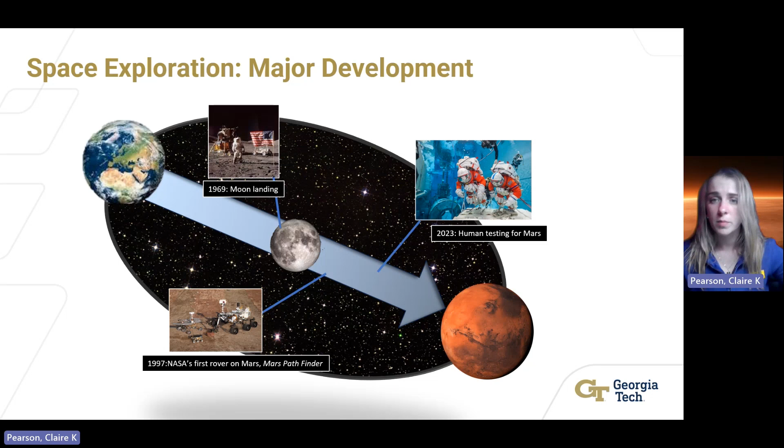In 1969, the lunar landing occurred with Neil Armstrong stepping foot on the surface of the moon. 26 years ago, Mars Pathfinder was the first successful rover to land on Mars. More missions have been successful to Mars, with Curiosity and Perseverance looking at the prospects of life once existent on the planet. Recent developments aim to have manned missions to Mars in the near future.

The big picture is to develop a dual Mars lander ascent vehicle with reliability and features for human and scientific interplanetary research. The goal for this mission is to enhance the processing and telemetry for better feedback control, while expanding the capacity to support life and increase samples. Throughout the mission, we want to ensure reliability and safety for astronauts with power and life support systems.

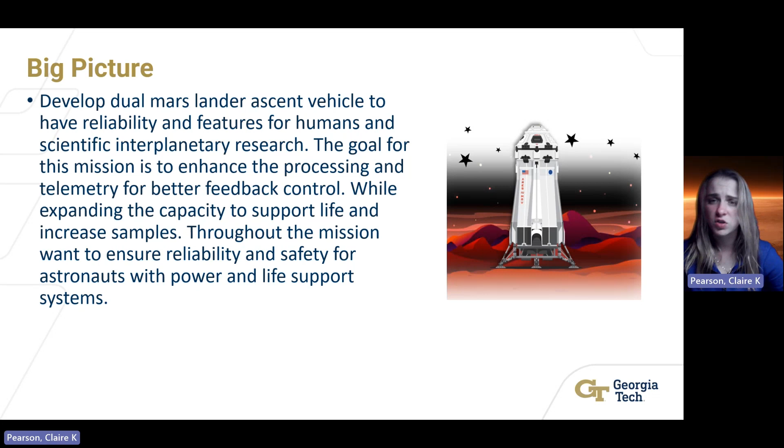Experienced low-cost technology and development, along with media coverage, have incentivized academic research and private companies to work alongside NASA and international space agencies. These are the stakeholders interested in the DLMAV project for Mars.

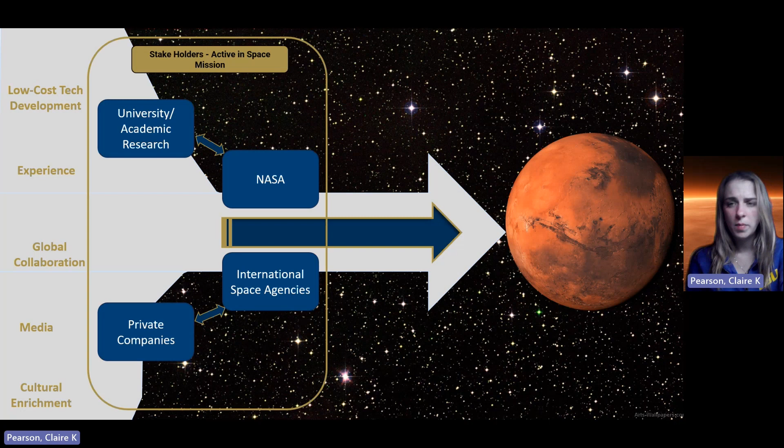Define the problem. The competitors for this project can be seen below. Russia in 1971 had the first lander on Mars. It lacked control and no data was collected during that mission.

In 2021, China launched Zhurong. It was a lightweight vehicle and had great navigation but lost power recently. In 2023, NASA launched Perseverance. It had a range of instrumentation and battery support systems. Improvements to it should be the control and computer processing system.

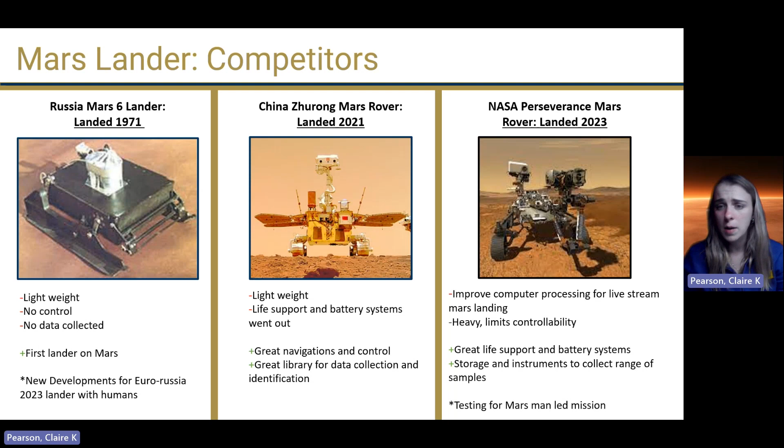New developments are being made by these organizations towards humans landing on Mars. The mission of the dual Mars lander ascent vehicle is broken down into its parts: a successful launch and landing of a dual-person crew, enhanced vehicle control to land within 1 kilometer of each other and carry 25 metric tons, and finally to return to Earth safely with its samples.

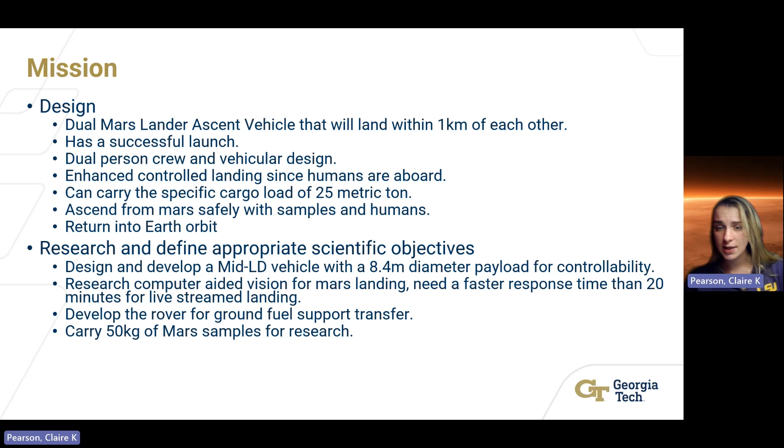Research and science objectives are defined by developing a mid-L/D vehicle with an 8.4 meter diameter, research computer-aided vision to have faster response times than 20 minutes, and to develop the rover for ground fuel transfer support, carrying 50 kilograms of unique Mars samples for research.

The mission overview of the DLMAV includes Stage 1, the launch; Stage 2, interplanetary travel; Stage 3, landing; Stage 4, sample collection; and Stage 5, ascent back to Mars orbit.

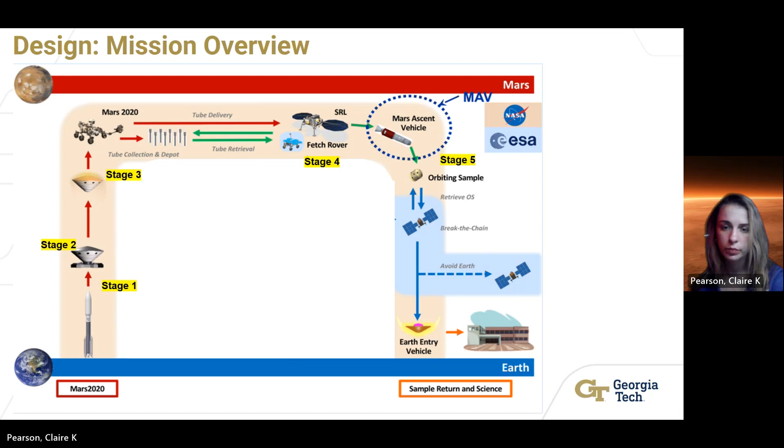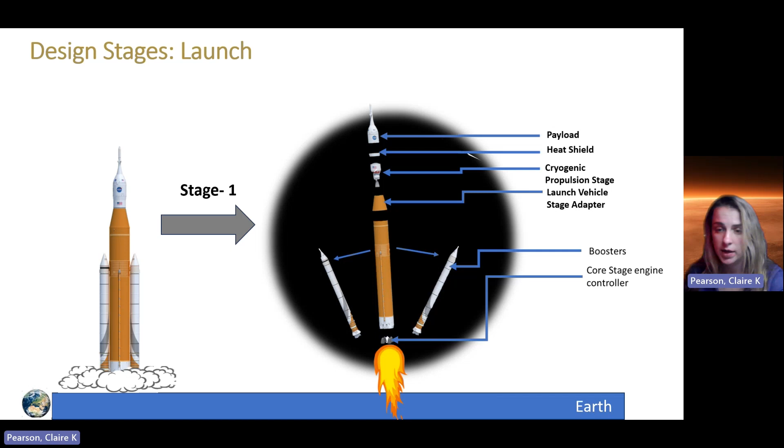In Stage 1, the launch, we see on the right our booster stack, which we use to exit Earth's atmosphere. We have some SRBs, which boost off from our liquid fuel booster stage, utilized for fine-tuning our orbit around Earth, where we disconnect into the cryogenic propulsion stage for interplanetary travel.

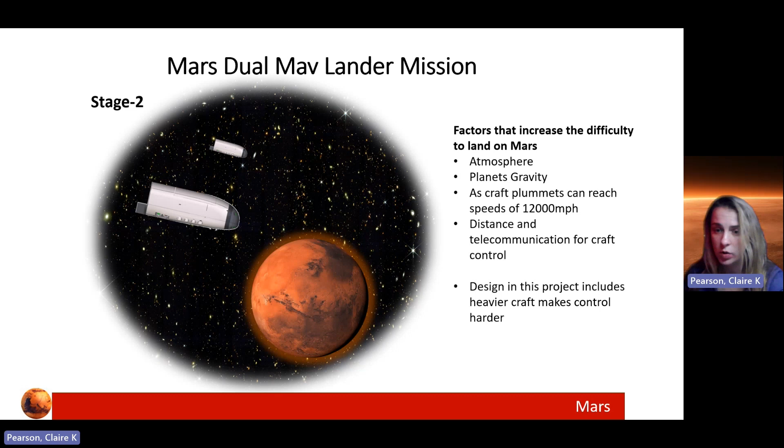Throughout Stage 2, we conduct interplanetary travel, and at the end we orbit Mars and enter the Martian atmosphere. There are several things we have to consider. Mars has an atmosphere as a planet, which will create drag and heat upon our ship. These are extreme forces that would not be experienced with things like asteroids or entering the moon.

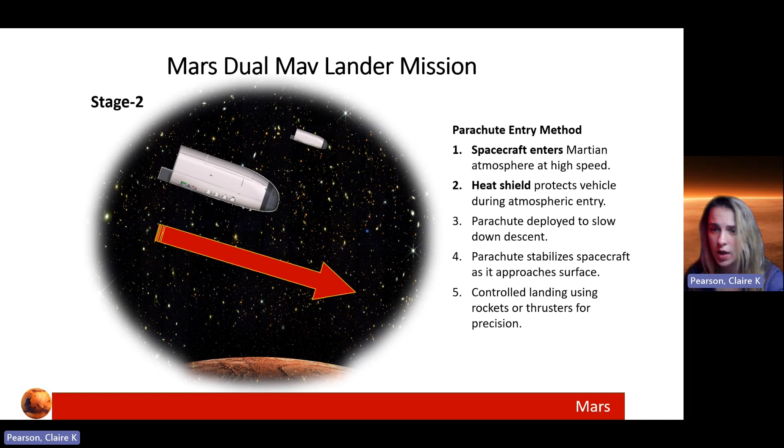As the craft approaches the surface at suborbital speeds, roughly 12,000 miles per hour relative to the surface, heat shield technology is utilized to protect the craft from extreme temperatures, which would melt any standard material. This protects the vehicle and crew upon descent.

So we begin our descent, and we have to kill off an extreme amount of delta V, meaning that we need parachute deployment in order to do that. The parachute stabilizes our craft, and by that means we reach very low velocities relative to the surface.

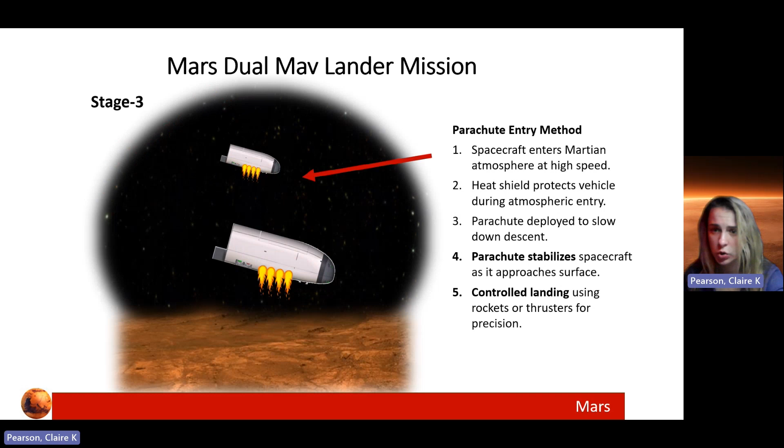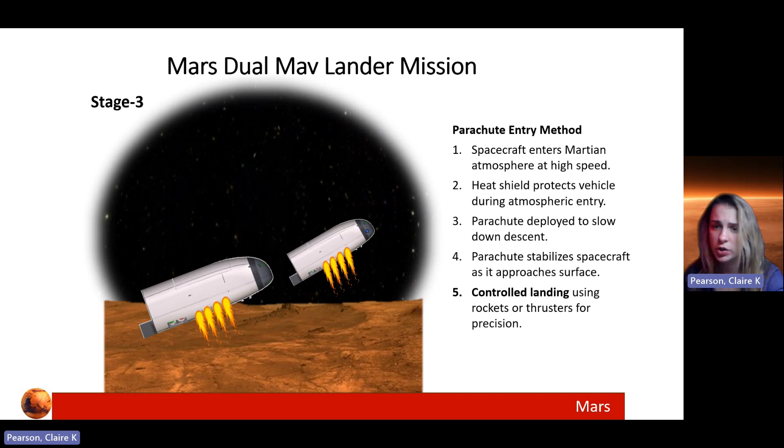The parachute deployment allows for a speed permissible to fine-tuning through rocket boosters that give actuated control of the landing. Utilizing the thrusters to fine-tune our exact trajectory relative to our landing point, we begin to fine-tune our landing spot within 1 kilometer of the 2 vehicles. This finalizes the descent stage as we open the lander legs to initialize the landing process.

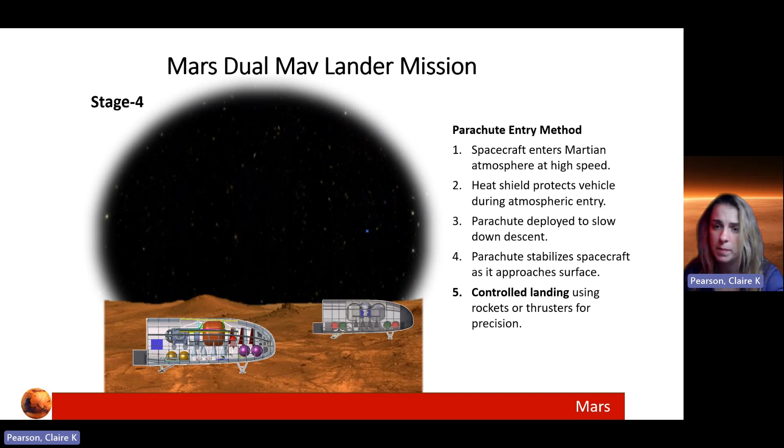Moving on to Stage 4, Mars sample collection, this is a system view of the mid-L/D vehicle designed for landing on Mars. On the surface, the crew will then begin to perform EVA collection of samples and explore the Martian terrain.

The rover will be utilized for the fuel transfer operations of the dual vehicles.

The MAV launches and starts the ascent back to Mars orbit, going back into orbit. This is the payload for the dual Mars ascent vehicle. Noticeably, the cargo hatch is nice and large, designed for the collection of the 50 kilograms of unique Mars samples, a constraint of the project. You can also see beneath it the boosters and landing engines visible for the vehicle's descent.

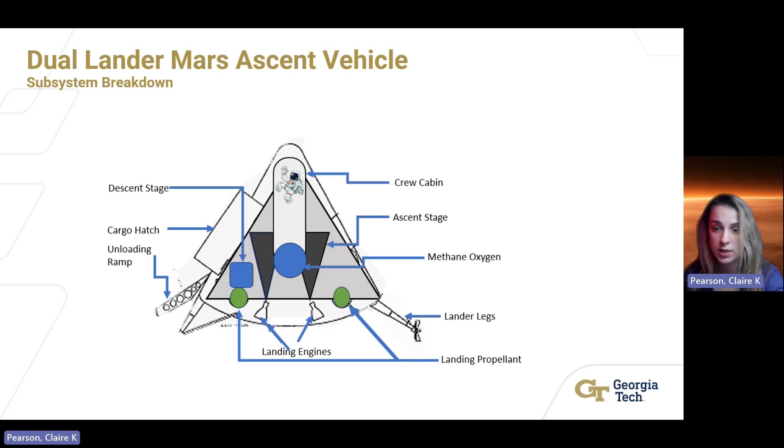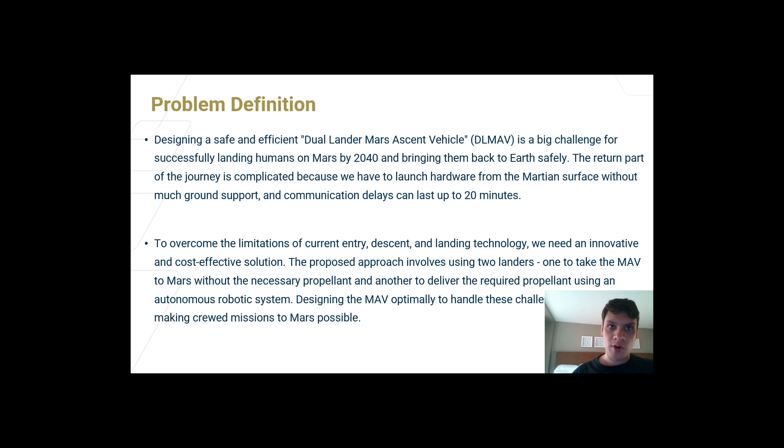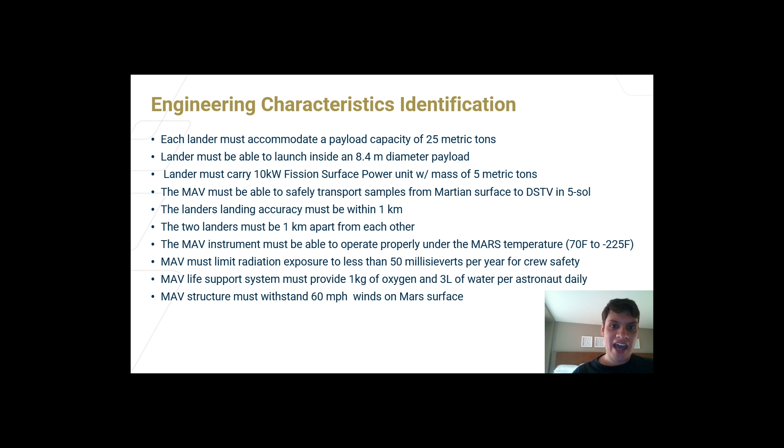So now we get to the heart of the problem. We have to design a Mars ascent vehicle that is able to take humans from an orbiting station down to the surface of Mars and back up again, along with whatever cargo and samples may be on board. This will have to be done under certain limitations, such as a maximum or minimum payload capacity of 25 metric tons, and having the lander diameter be within 8.4 meters, along with other limitations.

Hello, this is Landon, and I will now give a concise description of our concept of operations.

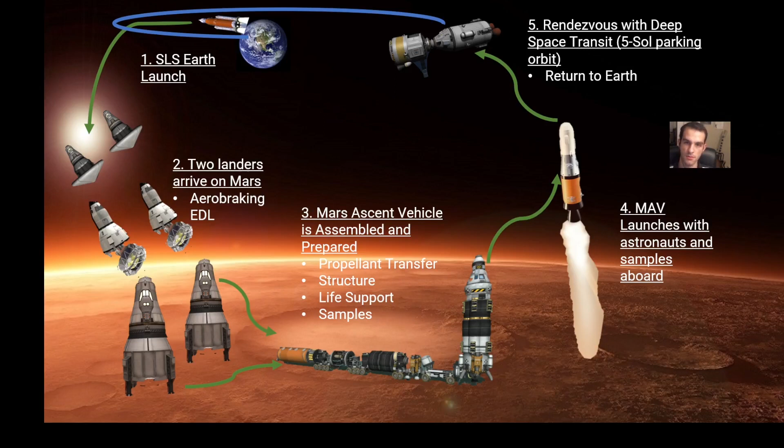The functional architecture is broken down into propulsion, life support, ground support, GNC, telecommunication, data acquisition, and vehicular design.

With a reference input from ground control, we have peripheral sensors like the thermocouple, altimeter, and gyroscope to develop our orientation and computer vision, which is fed into a fast Fourier transform correlation algorithm, which is then fed back into the control system to have fine-tuned control.

Hello everyone, my name is Yassine, and I am one of the team members of the dual landing Mars ascent vehicle. In this slide I'm presenting QFD Room 1. The focus is the customer requirement for this vehicle.

One of the most significant challenges is the absence of ground infrastructure on Mars, combined with the communication delay lasting up to 20 minutes. These factors present some of the toughest hurdles for our mission.

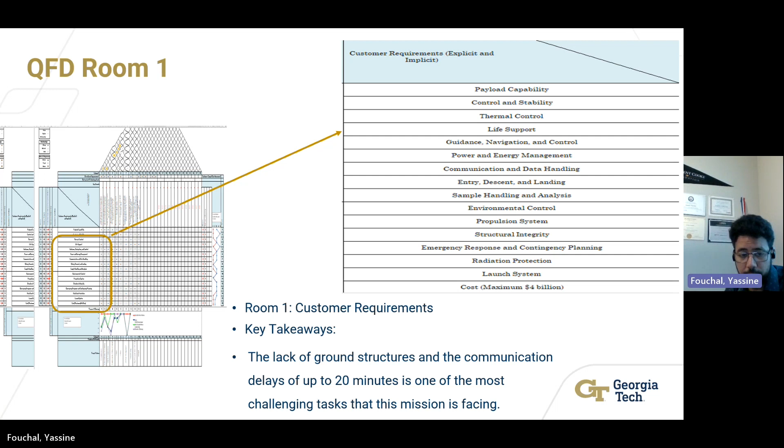In Room 2, we focus on the engineering characteristics, given that this mission has never been undertaken before. We expect most of the characteristics to be oriented toward improvements.

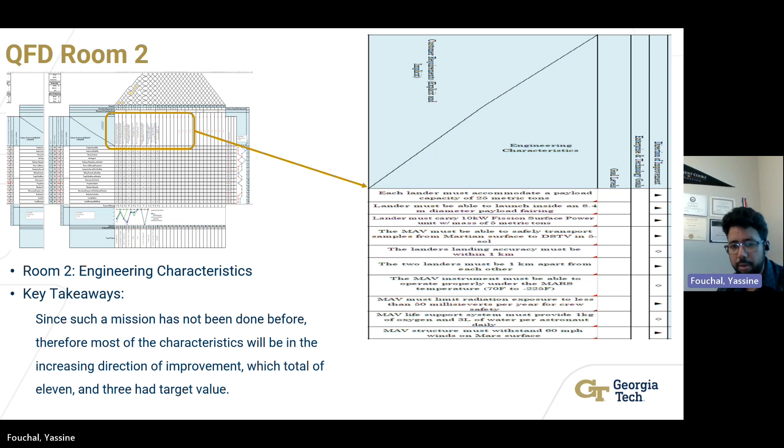In Room 3, our focus is on the relationship matrix. The key takeaway highlights the interconnection between engineering characteristics and customer requirements. All engineering characteristics have at least one strong relationship with a customer requirement, emphasizing the importance of aligning our design with customer needs. Specifically, customer requirements 1, 2, 3, 4, and 7, as shown on the slide, demonstrate the strongest relationship with the engineering characteristics. These requirements play a crucial role in guiding our design decisions and ensuring that we meet customer expectations effectively.

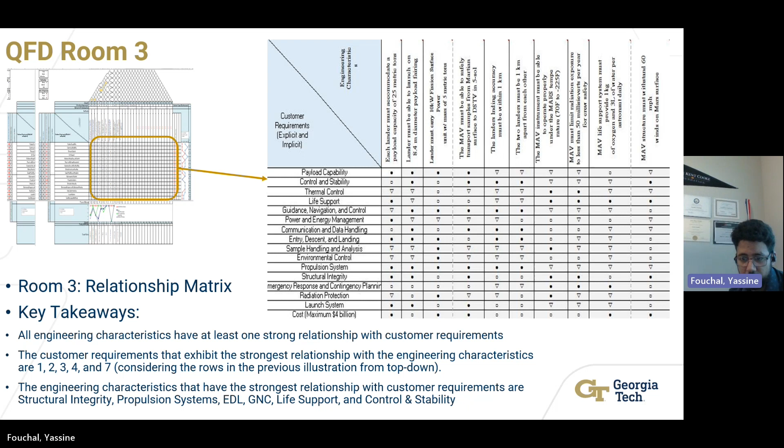Furthermore, the engineering characteristics of structural integrity, propulsion system, GNC (guidance, navigation, and control), life support, and control stability exhibit the strongest relationship with the customer requirements. These characteristics will be key focal points in our design process to ensure they align properly with each other and address customer needs efficiently.

I'm Landon, and we're now going to go over QFD rooms 4 through 7. Here we have room 4. We have interesting findings in which most of the rooms have a positive correlation, and the others have neutral ones.

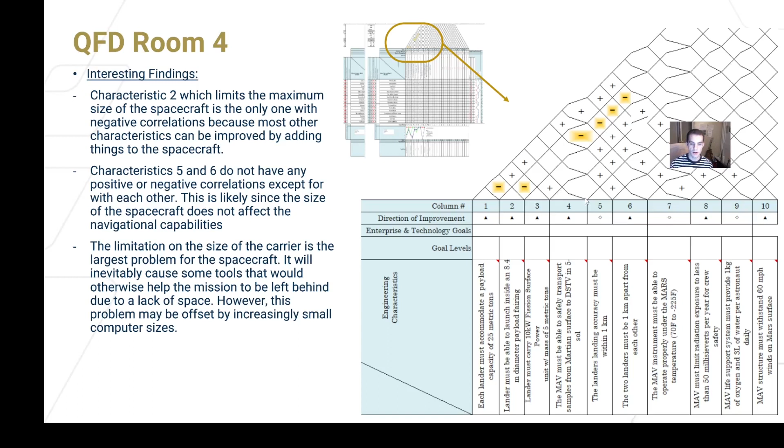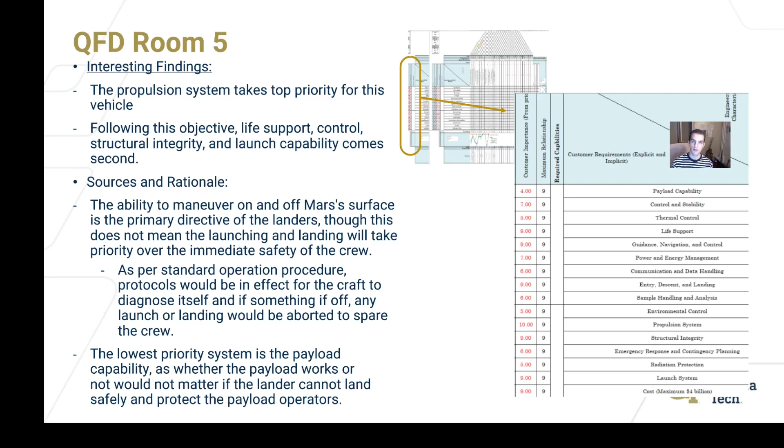Now here in room 5, we have the interesting revelation that the propulsion system is our top priority, and that everything else is of similar importance, but in any case we should give most attention to our propulsion development.

Now for rooms 6 and 7, we found that some of the most important criteria are the 10 kilowatt fission surface device, our adherence to launch constraints such as the 8.4 meter fairing, and the inclusion of oxygen for the life support system on the MAV and other components of the mission as required.

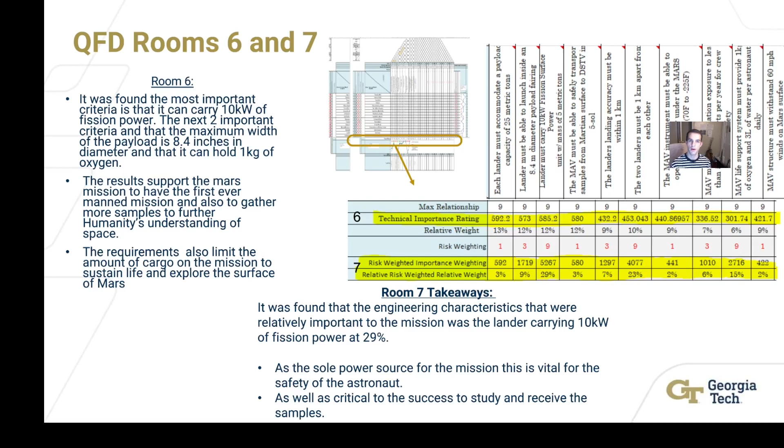Hi, this is Robert. So now for the 8th room of our QFD, the competitive assessment. Who would our proposed lander be competing against?

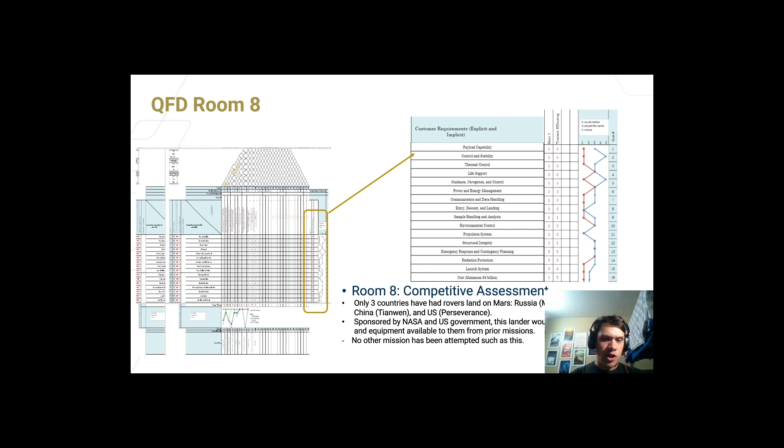So far, only 3 countries have actually had rovers land on Mars: Russia, China, and the US. So if we were to be sponsored by the US government, this lander would have equipment from past Mars missions available to them. However, no other mission in history has been attempted such as this one. This would be by far the largest mass and payload requirements of any previously attempted Mars landing, and would likely be the first ever instance of a crewed lander mission.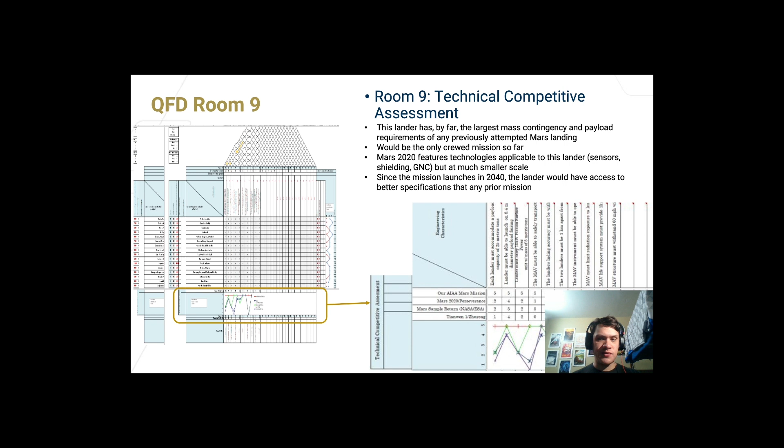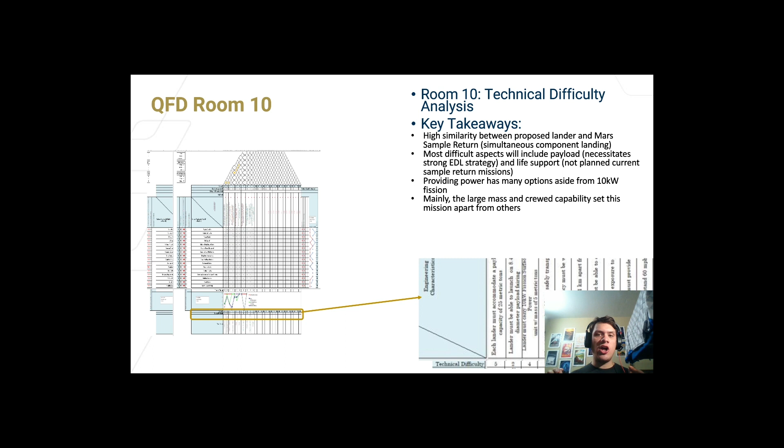And although we have similar technologies for sample return on the Perseverance rover, it would be much more advanced than anything we'd ever seen before. Therefore, despite having access to previous technology, requirements such as having the Mars ascent vehicle be able to produce thrust enough to get into orbit all on its own would be extremely difficult, and at this point, untested compared to some of the previous Mars missions.

However, as you'll see in these slides here, the target values for our lander are only, say, we want the full lander to have a payload weight of about 25 metric tons, not too much. The whole thing would be about 8.4 meters, so it is within the scope of imagination. None of this truly seems out of the scope of possibility.

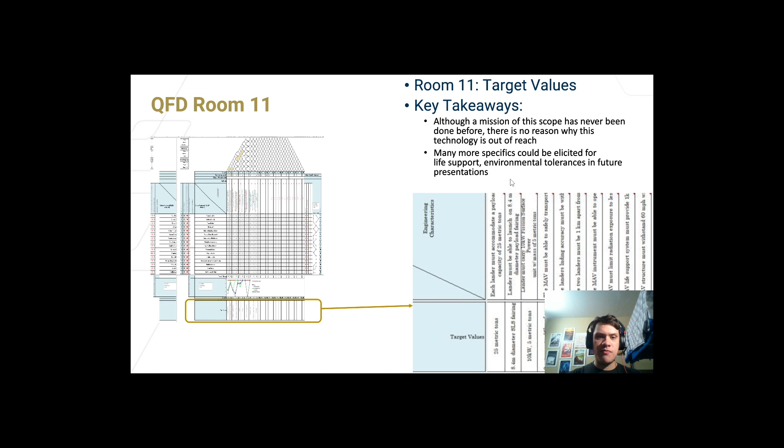So we have stakeholder needs and engineering characteristics we considered. So we have the NASA strategic plan as one of their main drivers, which is a current version published for this year, dictating where most funds are appropriated for NASA projects. It's a very useful resource.

And then for engineering characteristics, we have some examples of AIAA announcement opportunities used for this project, and also the Mars 2020 goals, in addition to other similar Mars and planetary missions which allow us to serve as baselines.

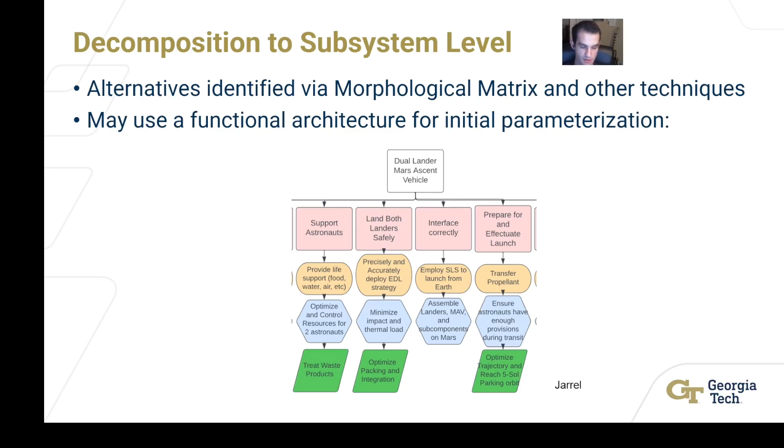And then for decomposition to a subsystem level, we have alternatives identified via morphological matrices and other techniques which allow us to come up with a functional decomposition. So this functional architecture presented here has 4 levels of decomposition, which allow us to concretely define our requirements, which leads us to model-based system engineering.

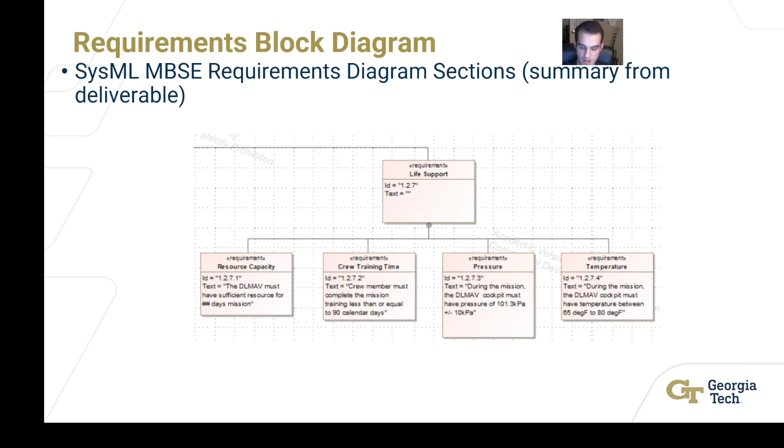So here is just a snippet, a screenshot of our MBSE submission deliverable for the project. And here we see, for instance, our customer requirements defined, which are encapsulated from AIAA. And here's a very specific view of engineering characteristics: structures, power, and propulsion here represented in terms of the requirements diagram for our deliverable.

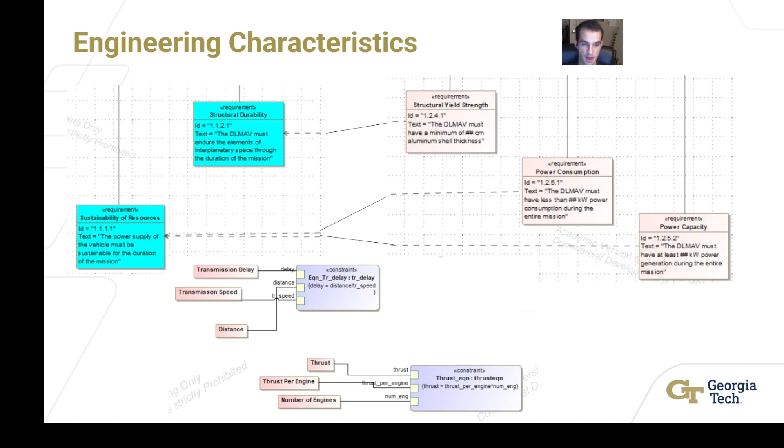On the bottom, we have how our constraints are defined for a couple of equations that are solved. And here we have an even more specific view of the thrust equation and the parameters that go into these. So we have a propulsion requirement which we derived, an engine requirement, and a number of engines, so we have thrust and how many engines it would take for us. And then this is all compiled into one big constraint.

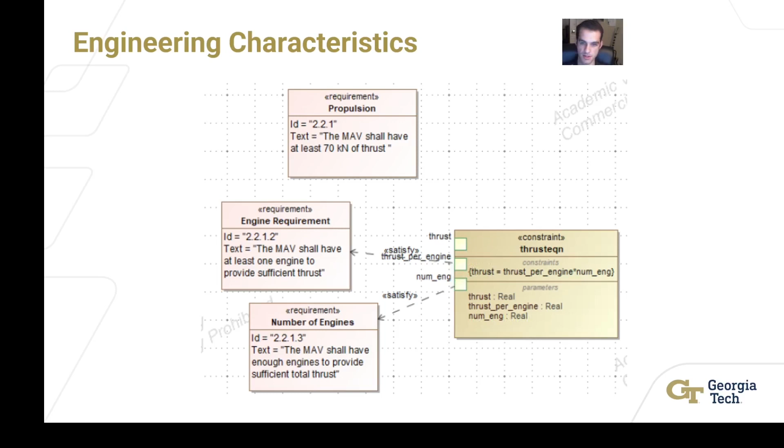Next step in our project is to generate a feasible alternative for our vehicle. And to do that, we had to utilize a morphological matrix. A morphological matrix is super important in early design phase. It's like a handy tool that helps us explore and combine different design options for different components of the vehicle.

With this tool, we can analyze and pick the best combination of propulsion systems, material, structural analysis, structural elements, and so forth. This innovative vehicle demands careful consideration of various functions and characteristics, each contributing to this mission's success. In our morphological matrix table, we have considered 4 different alternatives, from autonomy in attitude control with sensor-based and GPS-based options, to a range of power sources like solar, nuclear, radioisotope thermoelectric generators, and even nuclear fusion.

As far as structural choices, we have got 3 top materials: carbon composite, aluminum alloy, and titanium alloy. Carbon composites are super light and strong, great for spacecraft frames and payload structure. Aluminum alloys have a balance between weight and strength, while titanium alloy, on the other hand, is super tough and can handle extreme conditions.

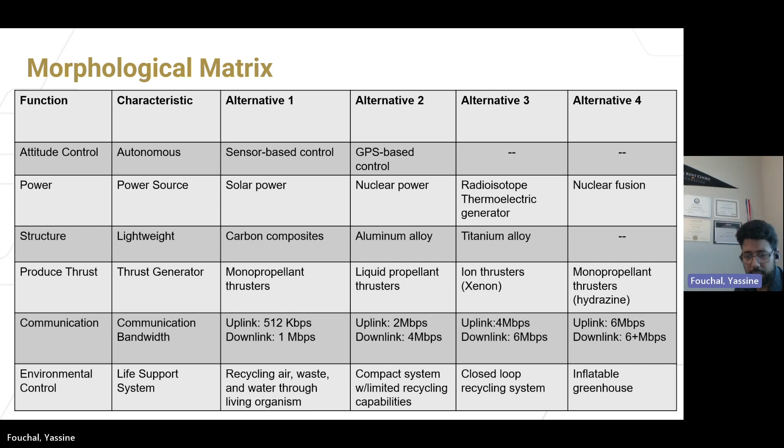The next step in our project is to evaluate our alternative to make sure that our vehicle can take off from the Martian surface and get back into orbit, so they can rendezvous and head back to Earth. We have to investigate the best way to produce thrust, making sure it's efficient and reliable, because that's what will get our vehicle moving in the harsh conditions of Mars.

The ion thruster with xenon emerged as the front runner in our produced thrust trade study, boasting a remarkable score of 75%, which can be attributed to several key factors, such as redundancy and reliability, as it scored a perfect 5 out of 5 in these criteria, showing its unique robustness and consistency, as they are crucial for this mission.

Additionally, with a stability rating of 4 out of 5, the ion thruster proved itself to be steady and reliable, vital for maintaining precise control and stability in the Martian environment.

However, it scored lower in weight and cost, achieving 2 out of 5. It's essential to consider the trade-off: the ion thruster's higher weight and cost are offset by its unmatched reliability and performance, which ultimately make it the ideal choice for this vehicle's produce thrust needs.

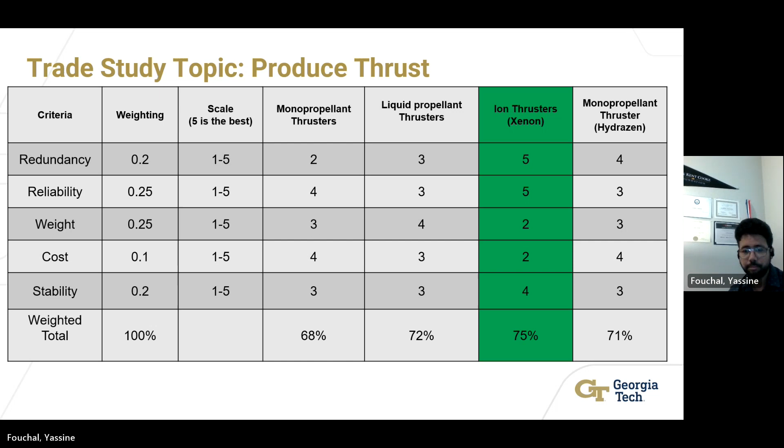It's Landon, and I'm now going to talk about proposing a suitable concept.

As outlined in our prior concept of operations, we have interesting features we seek to implement which make our project quite unique. So we have employment of composite materials, oxygen generation on the Martian surface, and high packing density, to name a few, that will make our mission uniquely successful.

We have a suitable concept here presented in a graphical form. So there are 2 landers, which will have the SLS 8.4 meter fairing, and during the EDL phase, they have a heat shield and a hypersonic inflatable aerodynamic decelerator, which will serve to bring them very close to the Martian surface, about 1 kilometer. Then once these 2 components are ejected, the lander fairing is jettisoned.

This reveals payload containers, which each have radially mounted parachutes, allowing the payload to land safely on the surface of Mars. There are also airbags on the bottom to cushion their descent and landing.

Each of these will have all the required mission components. So we have the MAV and 1 lander surrounded by these payload containers, and then in the second lander we have the fission power unit and other supporting equipment that is required.

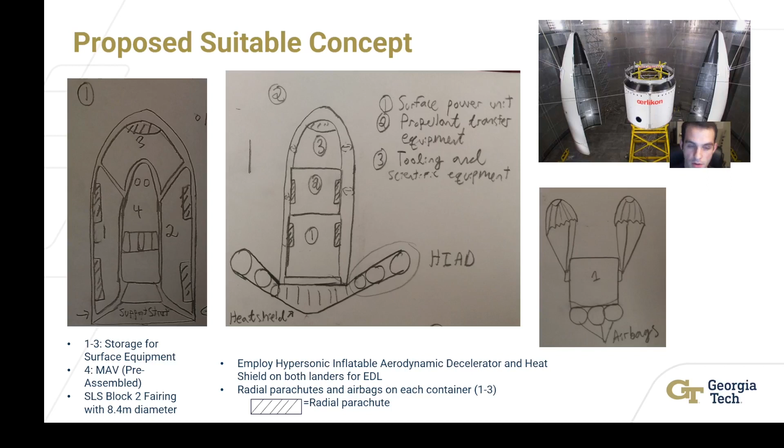Next, let's have a look at the verification matrix for some of our requirements. These requirements were shown in the SMART requirements slide a little bit earlier. These requirements would have to be verified at each step of the engineering process via different methods.

For some of the more complex requirements, such as the landers having to land a maximum distance of each other, this would have to be analyzed and tested via models. Or, for example, the landers having to carry 25 tons inside its inner cavity down to the Martian surface and survive all of the rigors of a Martian launch.

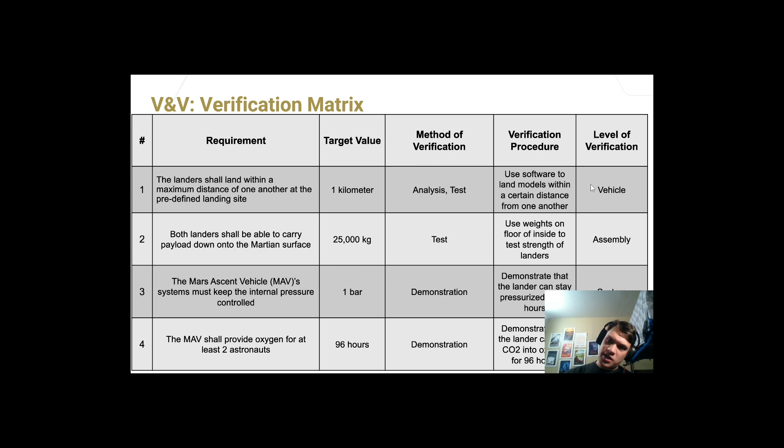These would have to be tested on the vehicle or assembly level, but some of these requirements, such as the ability to keep the internal pressure controlled, only need to be demonstrated. Or, for example, having the launchers have that maximum diameter of 8.4 meters, that can only be inspected. So these requirements, some of them are hard, some of them are easy, but all of them can be solved in their own unique way.

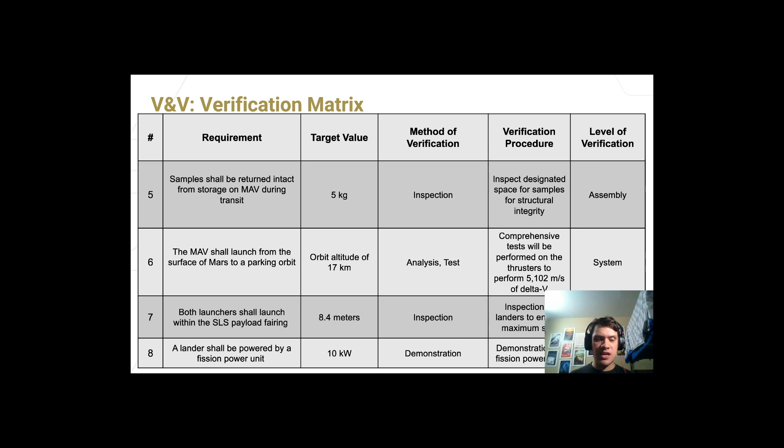Now, as for risks, there are risks associated with this mission, as there are with any mission. For example, there are some risks that have a very high likelihood of happening, such as radiation sickness of crew members. In deep space, there is no Martian magnetic field, so crew members would be exposed to high levels of radiation. This would have to be accounted for via radiation hardening of the outer hull.

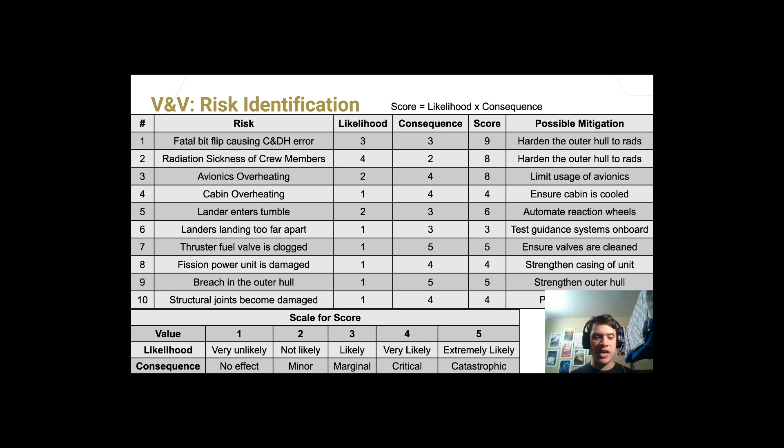However, there are also very unlikely but highly consequential risks, such as the outer hull being breached or the structural joints of the lander becoming damaged. These are also scenarios we have to take into account, and the landers would have to be specifically engineered to avoid these risks. Here is a risk matrix showing where all these risks are, taking into account their likelihood and their consequences should the risk come into play.

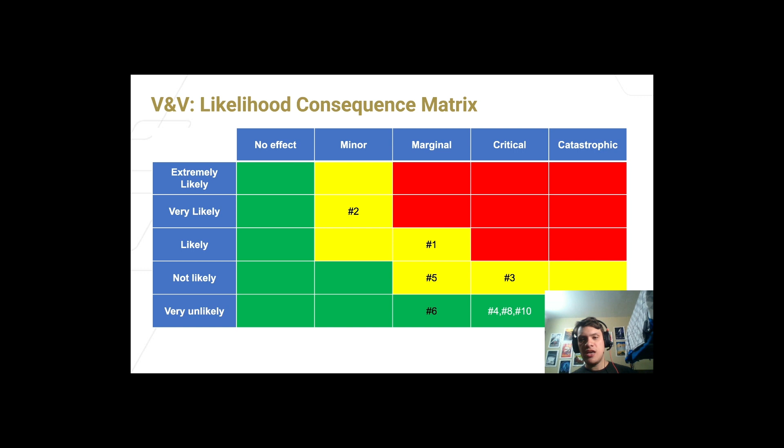As you can see, nothing too bad, but definitely something that will have to be engineered in the near future. In conclusion, our mission is to build a dual vehicle Mars lander, two landers between which carry 25 metric tons.

They will be completed by 2040. They'll make travel to and from the Martian surface easy, and they'll be able to transport cargo and samples to and from Martian orbit. With this technology, we will be able to expand the horizons of what is possible with Martian exploration. Thank you.